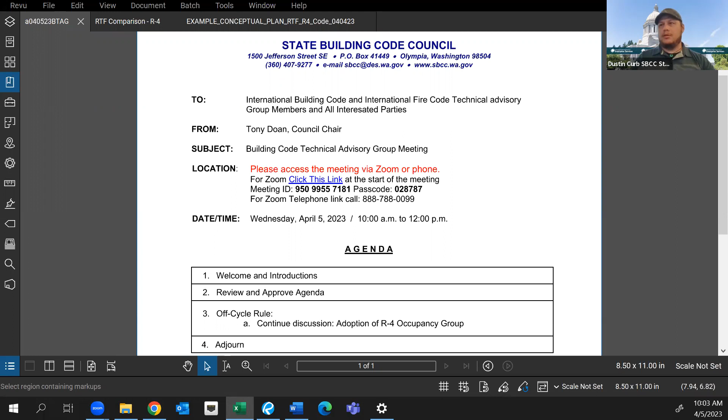Okay, well thank you, Dustin. And then to complete item 1, any other public, any other introductions? Anybody for the public like to be recognized? This is Ron Wright. Thank you, Ron. Thanks.

Okay, with that we'll move into reviewing and approving the agenda. Can I hear a motion to approve, please? This is Al, I'd like to make a motion to approve the agenda as shown on the screen. Thank you, Al. Second. All right, thank you, Michael. Any other discussion? All in favor signify by saying aye. Aye, aye, aye. Any opposed? Nay. Okay, so approved. We'll move to item 3, and I'll hand it over to Dustin or Stoyan, please, to

Remind us where we are. Okay, I will share my screen, and before I do that, just a question for the fire code TAG members. I'm expecting we'll be done with the building code portion today. There are some sections in the fire code, and I was wondering if we need to have specific fire code TAG meetings for the fire code portion. The language is very similar, if not the same. So I don't need the answer right now, but we may need to discuss that a little later.

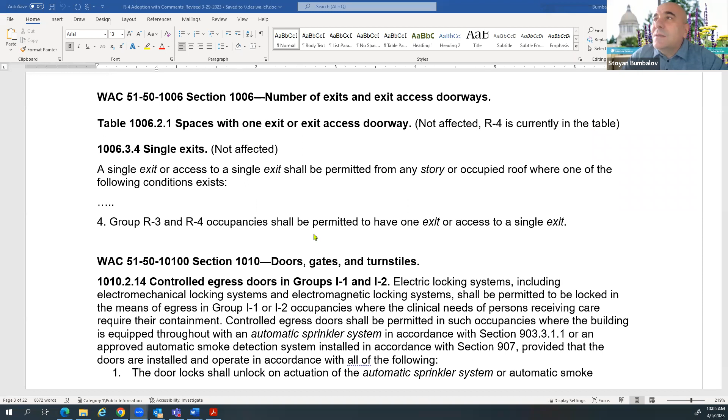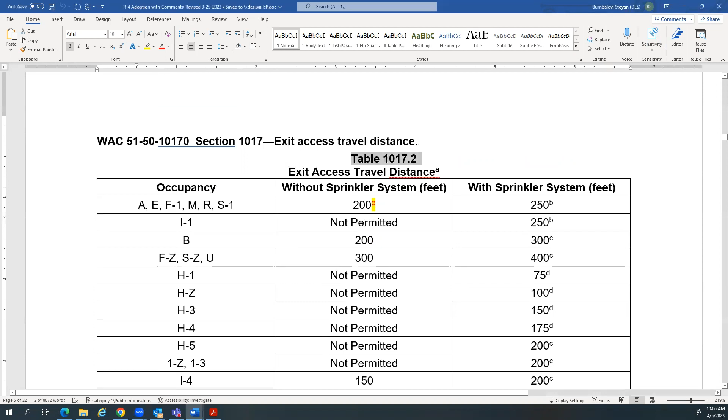And I will share my screen. I think the last meeting we went through section 1010, and I can't recall if we covered this one, 1017.2. I don't believe that we did. I agree. Okay, so but we did cover 1010, right? You agree with me? Yeah, I had agreed that it was no longer part of my proposal, and that I was willing to drop it. We're good then.

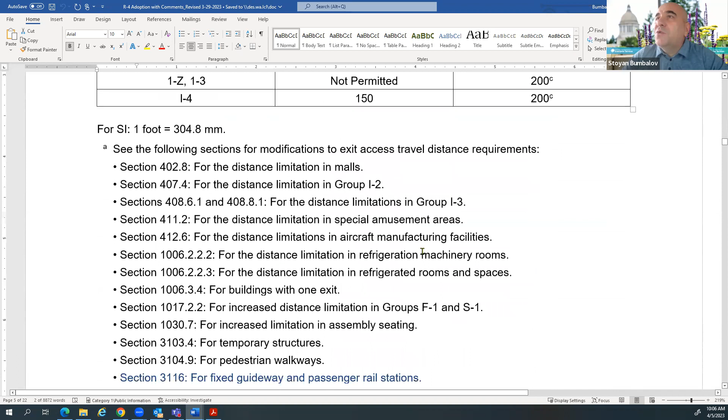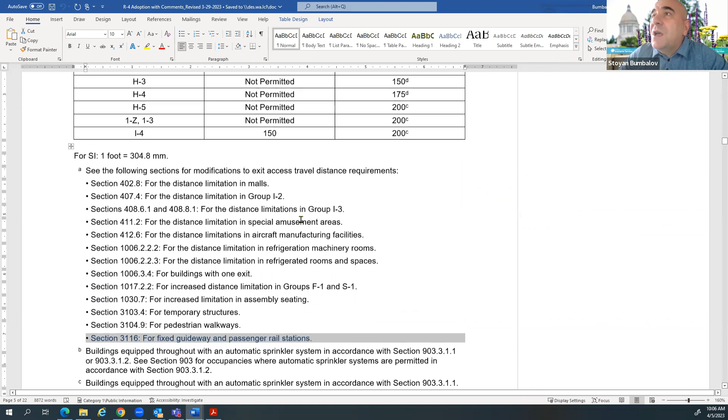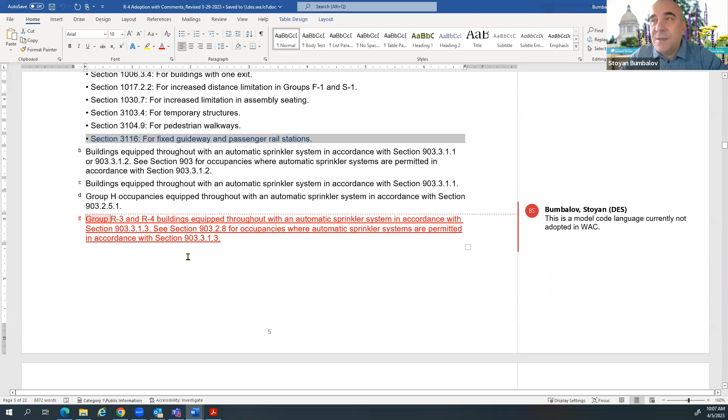The next one, 1017.2, I will make this a little bit bigger. Can you see the comments on the side? Is it big enough? Okay, so we have a model code language that is currently not in WAC, and this section has some existing Washington amendments, which means we need to add it, nothing special here, we're just adding model code language. So if somebody has issues with it, it's the time to discuss it. If not, then I'll go to the next one.

1019.3. So currently we have a state amendment that deletes R4. And if the agreement is that we're moving back R4, then we don't need the state amendment, and in the proposal the staff will show it with strikeout, because again it's no longer needed. So Stoyan, this is Al, can I just ask, you're saying that this state amendment is part of the model code, correct? When you see this R4 facility group, this is part of the model code, and the entire section appears in WAC because of this amendment that you see in blue. If we decide to adopt R4, then we need to add this language back. Well, we need to adopt the model code, which means we have to strike out this section from the WAC.

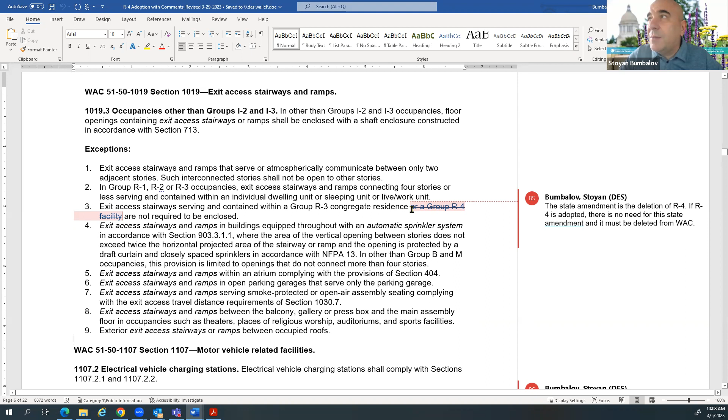Did I make it clear or worse? I thought you would just add back the language that you struck out. No, I'm showing here the existing amendment, how it reads in WAC. I added this here for discussion purposes, just to show you what the existing amendment is.

Well, I'm probably out of turn here. I hope you don't mind, Tony, but I'm advocating for us moving as close to the model code as possible. So I'd like that exception, that language, to come back into Washington State adopted code.

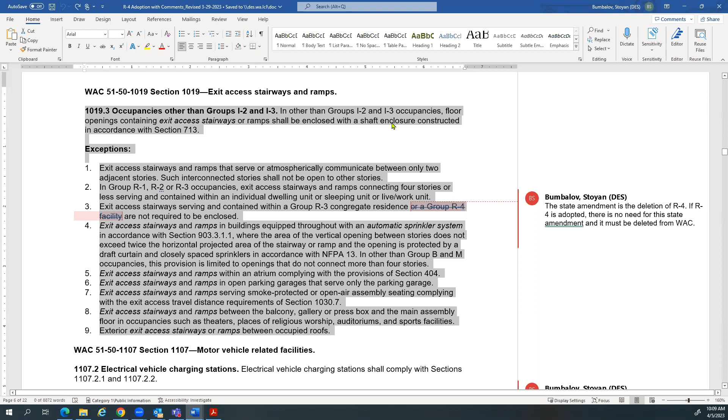My understanding is that's exactly what it does, the way Stoyan's describing it. Yes, it will disappear from the WAC because we will be adopting it in the model code. So would the WAC section 1019 then be reserved at this point after the modification? That's correct, yes, that's the right way of doing it. But again, this is stuff we will do.

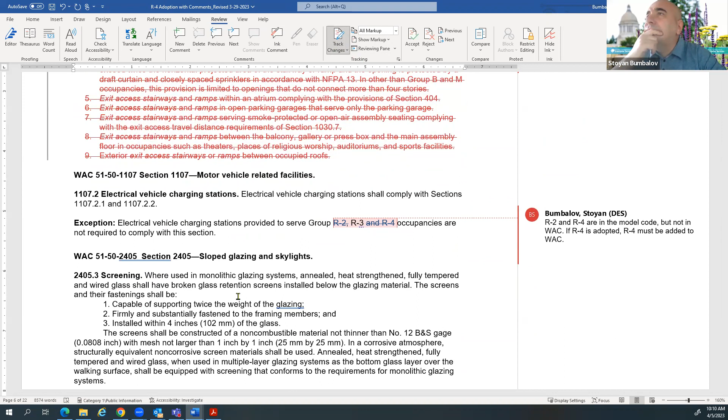11.07. Oh yes, this is related to accessibility. Currently, what you see here is the modification. R2 and R4 are not in WAC, they're in the model code. So the question is, we can't add R2 because it creates conflict with RCW 1927. Do you believe we need to add R4 here?

I checked for conflicts. I didn't see any, but I'd like to hear different viewpoints here.

Stoyan, can you clarify for me what RCW says that would exclude that from R2? The RCW is specific and requires the council to adopt accessibility provisions for R2 occupancies, and the model code excludes R2 occupancies. This is why when we were adopting 2021 IBC, we struck it.

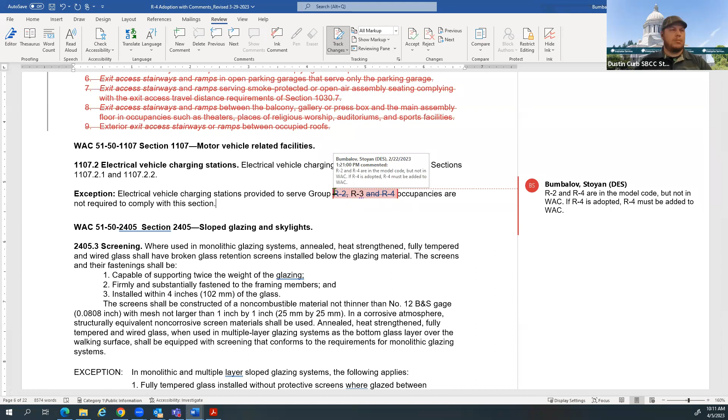So the amendment just needs to say R2 and R3. Or R2 and R4? Yes, that's correct. This is Al, I'd support that. Okay, so we are adding back R4.

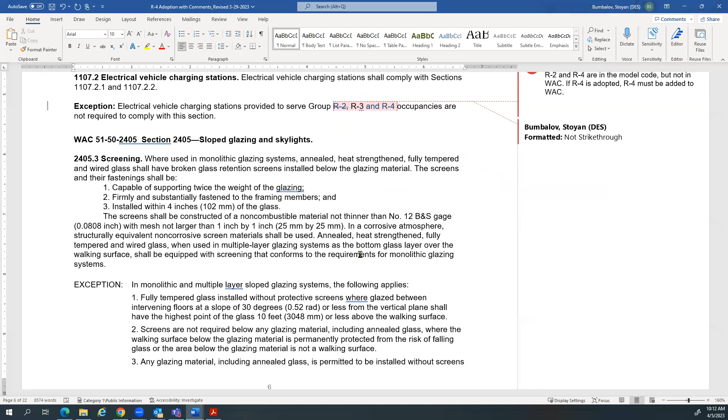Next one is 2405. So let me clarify a little further. This is not part of Ron's proposal, these are just sections that have R4 as part of the language. I'm not clear on that one. I guess electrical vehicle charging stations shall comply with certain sections. You're saying those sections are accessibility.

This is related to accessibility, yes. And if you're in an R3 or R4, we're saying you don't have to adhere to those accessibility provisions. I think the term accessibility wouldn't be the correct term because that equates more to disabilities and accommodations. Exactly, yes, this is the exact case.

No, that's where my confusion was coming from. So that clarifies it for me. This is model code language, and we struck R2 because we adopted provisions for R2 in section 429. Okay, okay.

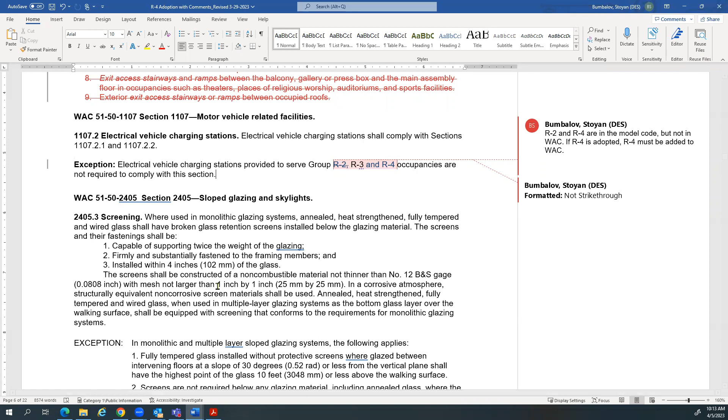2405. So the existing state amendment is the deletion of this text. My understanding is we need to keep it, but I can't consider myself a technical expert on that one. So the section is related to glazing and skylights, and this is the screening.

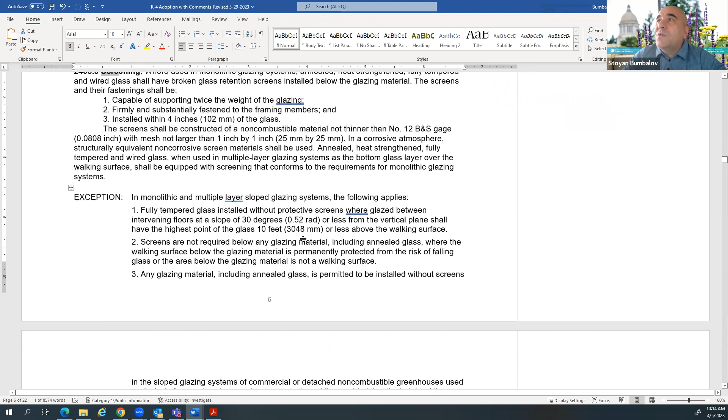And we're talking about an existing amendment in the exceptions. This is Al, I'd support keeping that amendment. I believe this amendment is in there from, I'd call it, an anti-ligature or safety security issue, where if you install a screen, you install a means for someone to secure something to that screen. So the alternate was to include the interlayer that would basically give you the protection against breakage.

So, at least this was a while back, but I do recall this was added because of the need for safety in facilities when you had an issue relating to... at least it came up. It came up more as a safety issue, the screen itself. When I was researching it, I didn't find any rationale for the adoption, but I agree with you, it's been in the code for a long time.

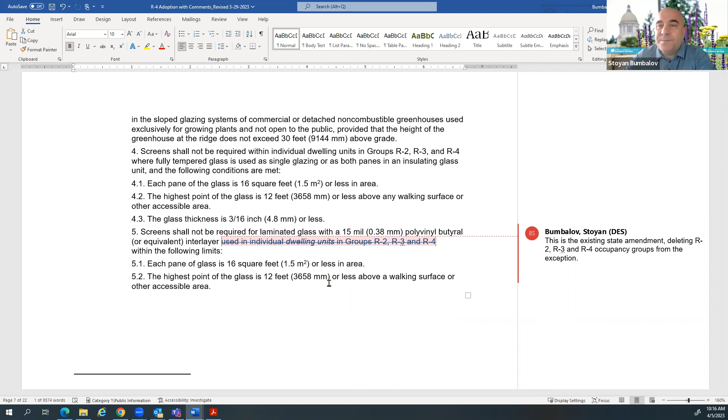Do we have agreement on that? Yeah, I would agree, makes sense. R4 does not change, we need to have what we already have.

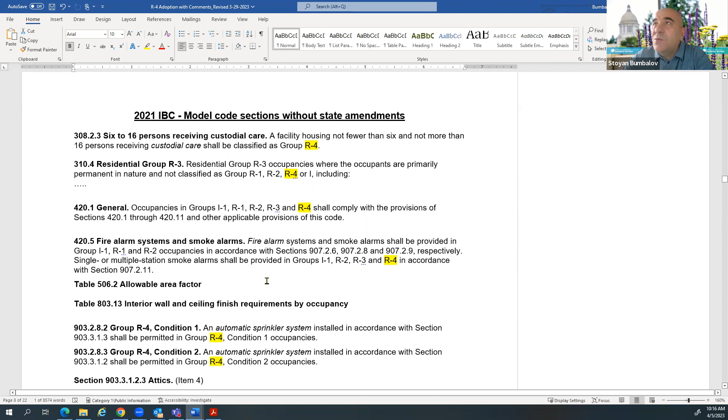Okay, moving forward. So these sections, they are not in the WAC, they are sections in the model code. We have sections here that address R4 somehow. And what the council staff needs to know is do we need to amend any one of these sections?

I don't know, Todd, how do you want me to proceed with that? Should we go section by section, or keep it on the screen, and if the TAC members or members of the public see issues with one of these sections...

Roger, do you want to weigh in? My preference would be to go one by one, because this gets into... well, at least the first one has been discussed a number of times. Is it 16? Is it 15? Is it 18? My personal preference is, if the model code is grouping these R4 as 6, is not fewer than 6, so 5 would be R2 or R3?

R3. 6 would be R4. 16 would be R4. 17 would not be allowed, or would be an I occupancy, I think. Is that right? That's correct.

My preference is rather than saying, in the state of Washington we think we should go up to 18 rather than 16, we follow the model code and put the break at 16 exactly like it is. I completely agree and totally support that, Roger. Same, that's my proposal—this is the model code, we're not changing anything, so we'll keep it.

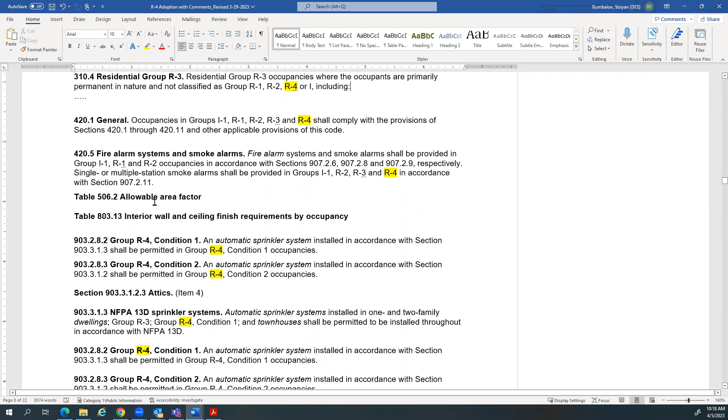420, story—sorry, this is Ken with Seattle. Are you showing the 2018 or 21? This is 2021. So then the 310.5—you already addressed that, right? Yes, we addressed it previously, it was in the WAC. These are only model code sections. Got it, all right, thanks.

420.1, again, it's just adding R4 to R3. Well, we're formally not adding anything—it's in the model code already.

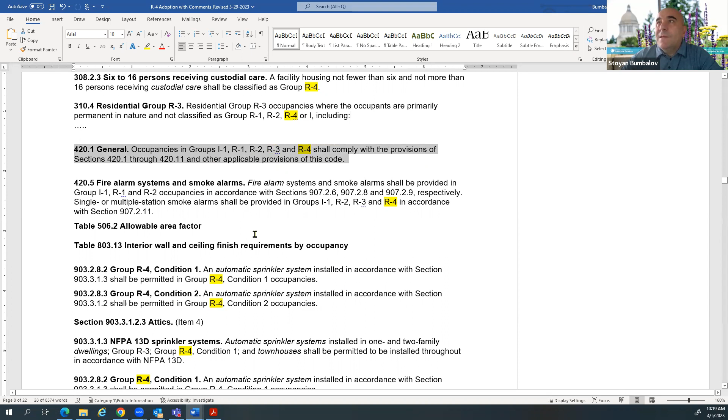420.5, fire alarms and smoke alarms is not my best area of expertise, so I'll wait for the professionals here. I support keeping it. Yeah, all good. I do too.

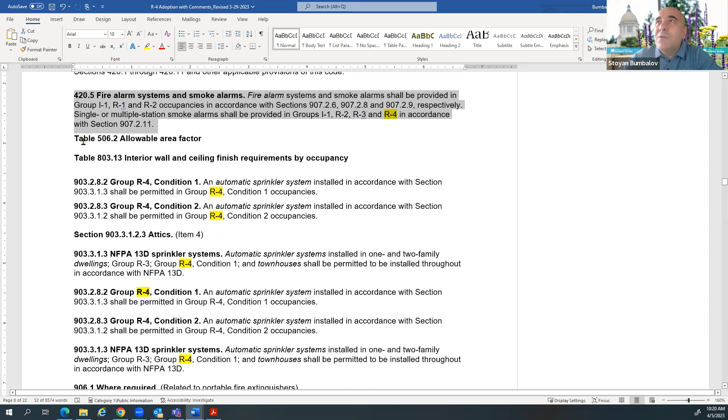Okay, we have allowable area factor and I don't have it here. Do you want me to find it and open the model code? It was a big table, so I didn't show it. No, I don't think so—if the intent is to kind of stick with what the model code has, you wouldn't want to mess with the table. Yeah, I don't think there's any issue with just following the model code. Yeah, I think we're gonna agree, probably, with a lot of these here, unless somebody has a concern.

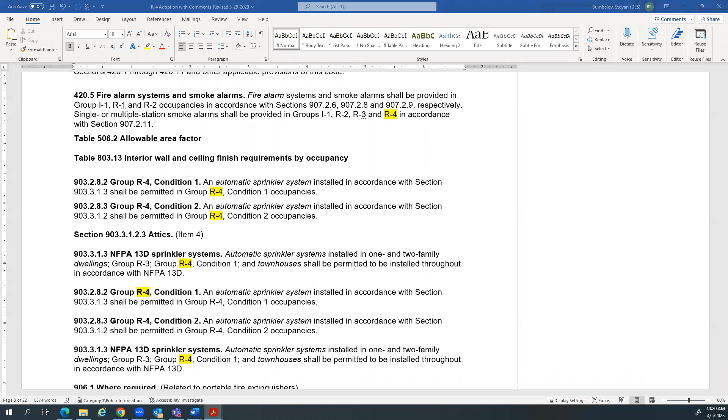But that'd be a new state amendment, so I'm comfortable with just leaving the R4s and all. I agree.

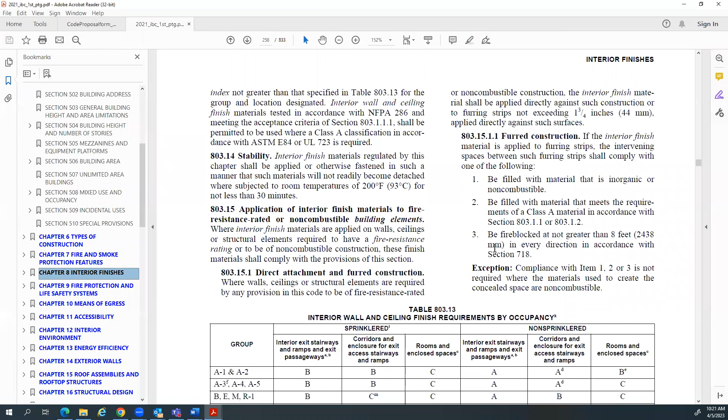I have the code open anyway, so if you need me to show something, I will. So table 803.13, this is the other one I didn't show because it was a big table. I can show it if you want, or if you're familiar with this. Well, I found it anyway. Okay, here it is, I think. It's the same thing—I don't think there'd be any problem with that. No, no reason for us to change it. Yeah, I agree. Okay.

903.282, this is for group R4 condition 1. I guess, again, if we're going with the model code, makes sense to keep it both sections right here. I agree, yeah—this is the NFPA 13D, 13R issue.

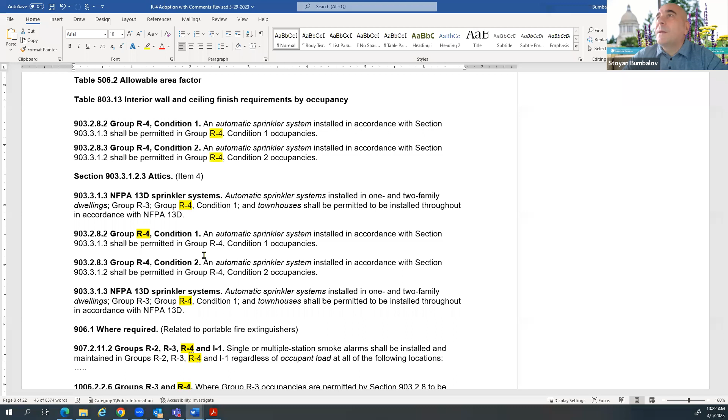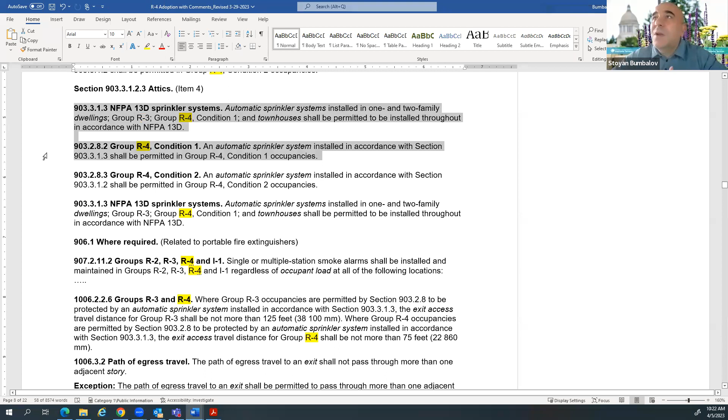903—sorry. 903.3123, do you want me to show it? I don't think we'll need to. Good, okay. 13D sprinkler systems, again group R4, model code. Well, we don't have it in WAC. Following the same logic, I guess you would like it in the code, same with the next one, group R4 condition 1 in 903.282.

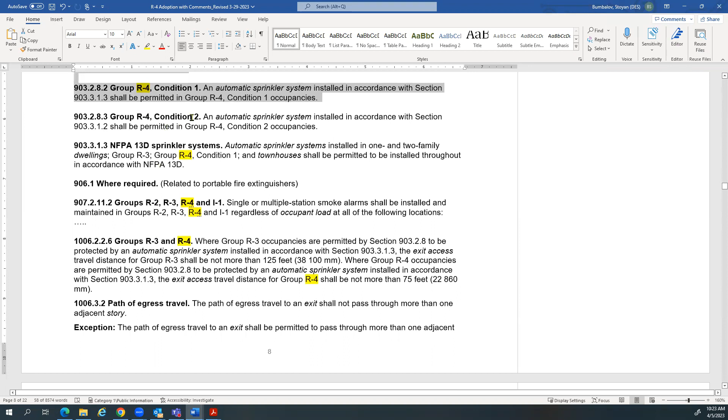Agree, yep, same with 313. Same with condition 2, I assume? Yep, yes. NFPA 13D, yep.

906.1, this is related to portable fire extinguishers. I don't have the text because it's a long section—if you want me, I can show it, if you don't we can go. Let's go with the model code. Let's go code, yep, yeah. Okay.

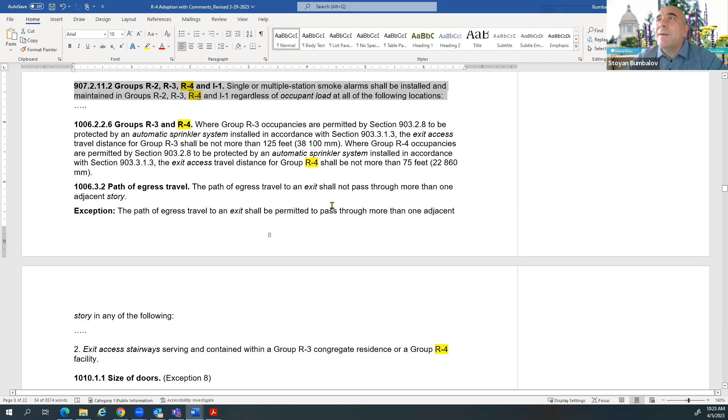907.2.11.2. I'm good. Okay, let's keep it.

Chapter 10 is always interesting. So, 1006.2.2.6. This is in the model code. Again, it groups R3 and R4.

There's no sense changing it. I agree. Yeah, good. Okay.

Path of egress travel, we have R4 in exception 2. Again, it's grouped with R3.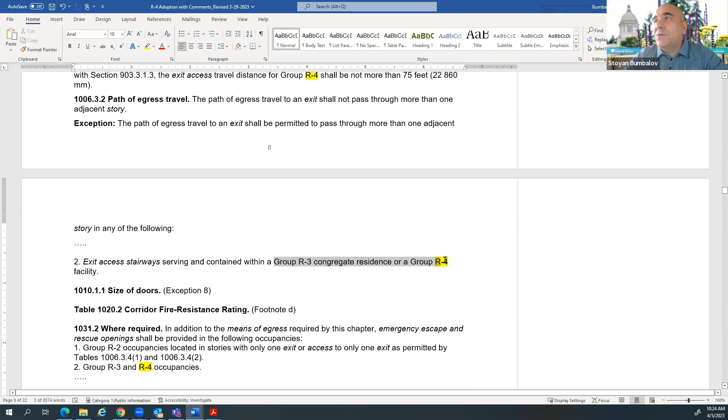Thumbs up. Anybody with thumbs down? No? Hey, that's easy. I'm not used to it.

1010.1.1, size of doors. We have R4 in exception 8. I don't have it here because it was too big of a section. If you want me, I can show it. If you don't, I can go.

Model code for me. Yeah. Model code. All good. Okay.

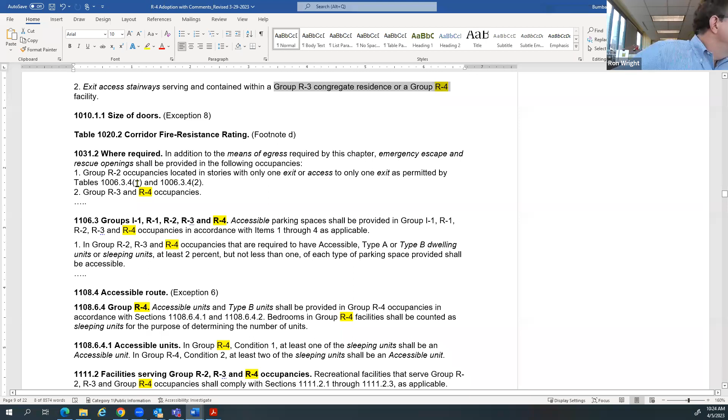The same with the table. There is R4 addressed in footnote D. It's kind of a big table, so I don't have it. The same, model code.

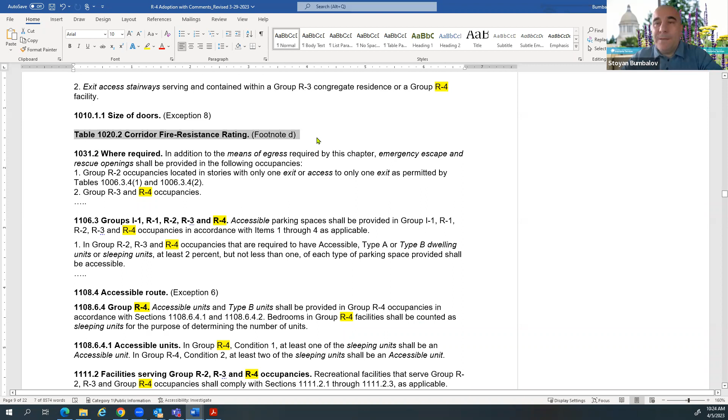1031. This is for the emergency escape and rescue openings. Again, group R3 and R4 are in the same.

Yep, looks good. Let's keep it.

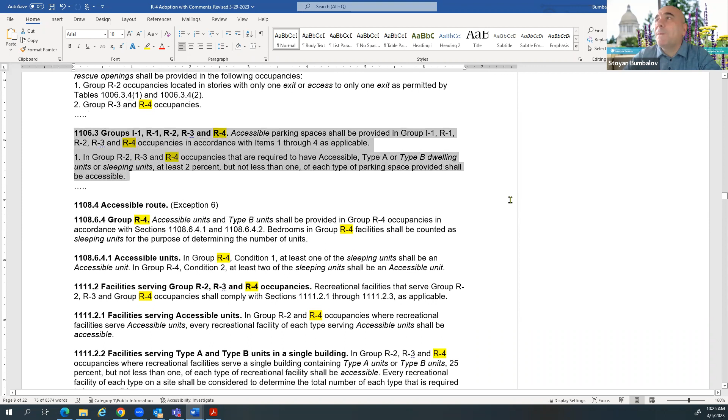This is accessibility. Okay. R4 is again with R3. Keep it. Yep, good.

There is a specific section for group R4, for let's see. Okay, so this is the scoping for R4. We need that.

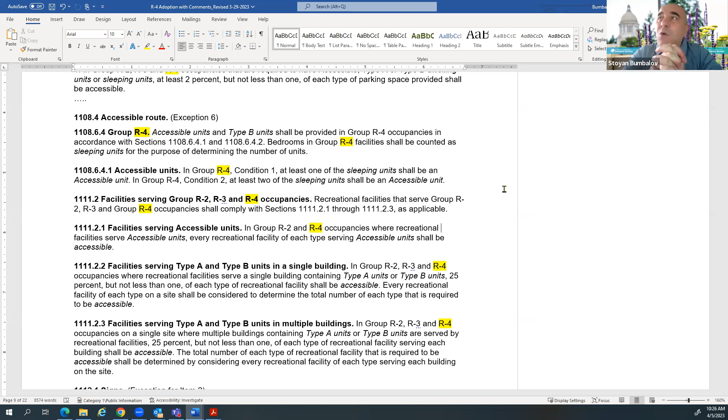Yes, fine. We had a follow-up, maybe an unfinished sentence from our previous session, but yeah, this is all fine.

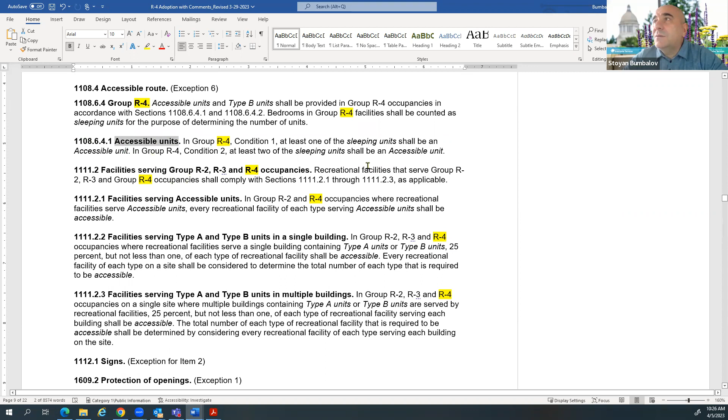Okay, so this is specific to the accessible units in R4. Good there. Yeah, keep it. Okay.

1111.2. So I don't know, is this one really challenging. Yeah, that looks good. Don't stress me, keep it out.

But once you mention recreational facilities, you never know what's gonna happen. Oh wow. Yeah.

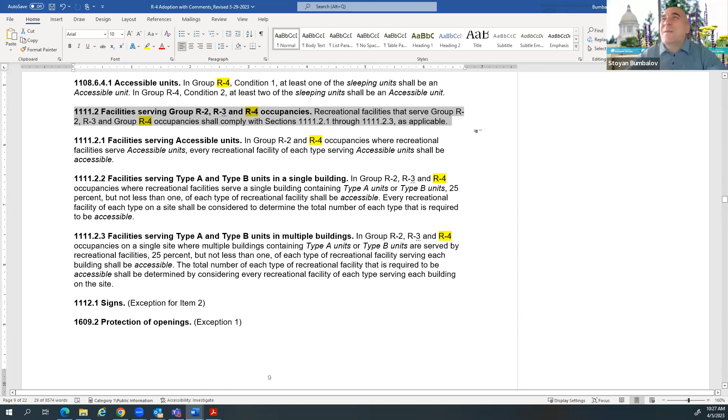This again, recreational facilities serving R2 and R4. Keep it. Yep.

This is still recreational facilities serving type A and type B units. So again, R3 and R4, following the intent. I'd keep it.

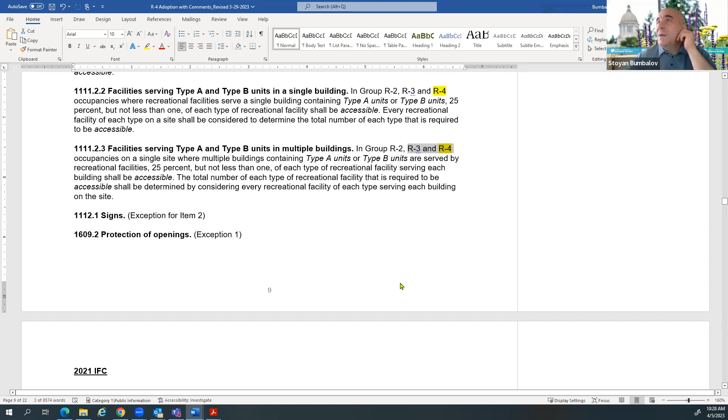This is for multiple buildings, the same thing, recreational facilities serving type A and type B units in multiple buildings, again R3 and R4. I'd support keeping it.

1112.1 is related to signs. R4 is mentioned in exception 2. Again, I don't have it because it was a big, long section. If you want me, I can show it.

I think we're good. Okay. Protection of openings, the same thing. I might like to see that exception.

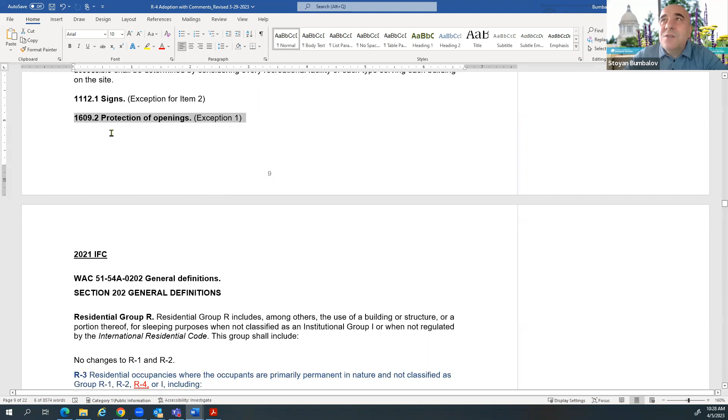Which one? 1609? Yes, okay. Well, you know what? Yeah, let's just take a peek.

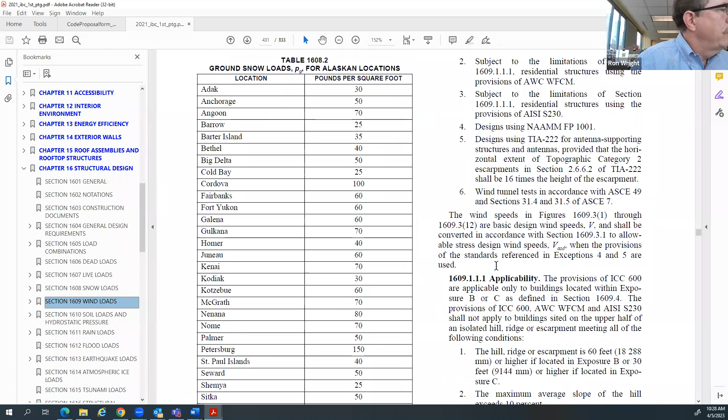1609. Oh, wind loads? Yes. Yeah, that's not an issue. No, I'd keep it. Okay. Yep. Yeah, okay.

I was thinking about opening protectives. Sorry about that.

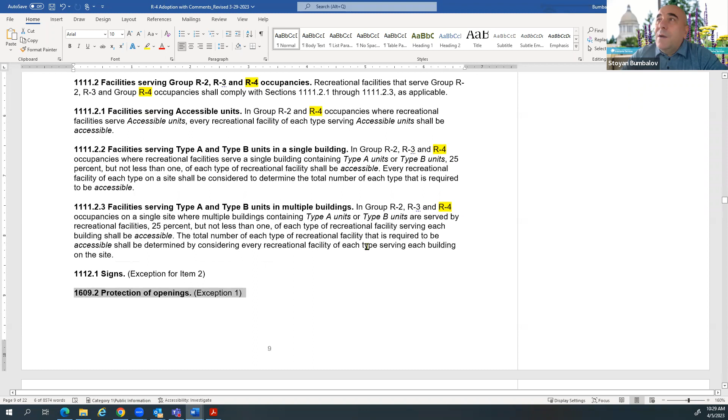Hmm, okay, so this is all in the building code. I think if the technical advisory group is in agreement, we can prepare the draft for the CR 102 and have it for the next BFP meeting next week and for the council meeting.

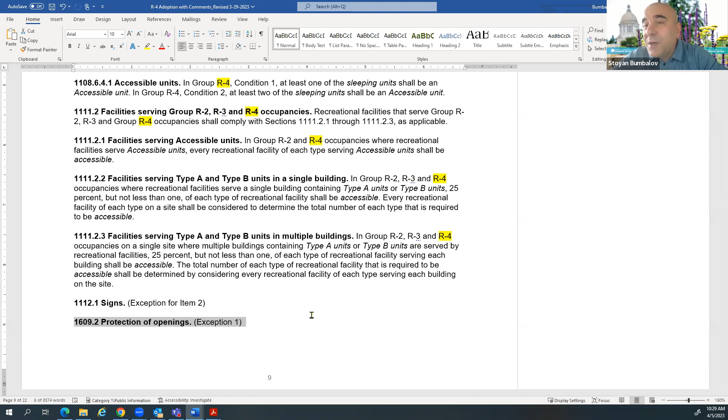And these sections here in the fire code, they were part of Ron's proposal. And I also have the sections in the model code that have R4 in the text.

May I ask Ardell and then Roger. Thank you, my name's Ardell Jalla, building official for SDCI. I'm sorry, I don't know the rules of the tag and engagement, so thank you for acknowledging, letting me ask a question.

One of the differences between I1, C2, and R4 is separation to rated corridors. I wanted to know if, I'm sorry I'm trying to track here, I'm not really seeing the discussion around differences between I1, C2 and R4. Is that going to be discussed?

This goes, this is Ron Wright. When I mentioned one sentence, it goes back to, and Ardell, I think we had this same conversation regarding dwelling units versus sleeping units, which is what really, there's a statement, there's an amendment which we talked about, but I don't know if we had resolution to, which requires units to be, I'm paraphrasing, but requires everything to be designated as sleeping units.

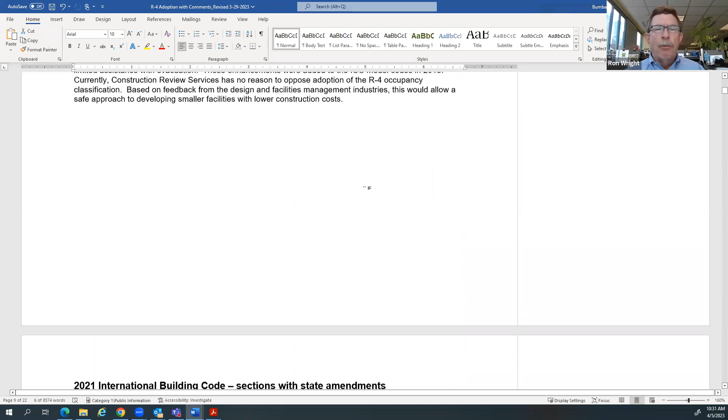But then that creates all of the fire partition and corridor separation, and in fact creates a situation where all the sleeping units can't be open to an open common room. It becomes an intervening room like a corridor.

There's a lot of issues related to that, but there was one sentence that Stoyan brought up in 420.2. We talked about the fact that if we're going to have a sentence like this, it needs to be back in the definition of a dwelling unit and a sleeping unit. There's a huge difference over whether you classify an 8, 10, or 16 bedroom residential treatment unit as a combined dwelling unit, or whether you individually classify each bedroom as a sleeping unit. If you do it as a sleeping unit, you've pretty well switched over to all the code provisions you'd have with an I1 condition. That one sentence negates the R4 essentially, is the point we were making.

I'm not sure we got a resolution last week on this one sentence. I want to let the tag know that SDCI's stance, the Seattle Department of Construction and Inspections, is that these are sleeping units and that RTF is not a dwelling unit. I don't know if Ken Roulette feels the same way, but we see those other R4s listed there as sleeping units that require separation, and they would have a rated corridor as an R occupancy. It's a disagreement with Ron and I on how we are interpreting the code.

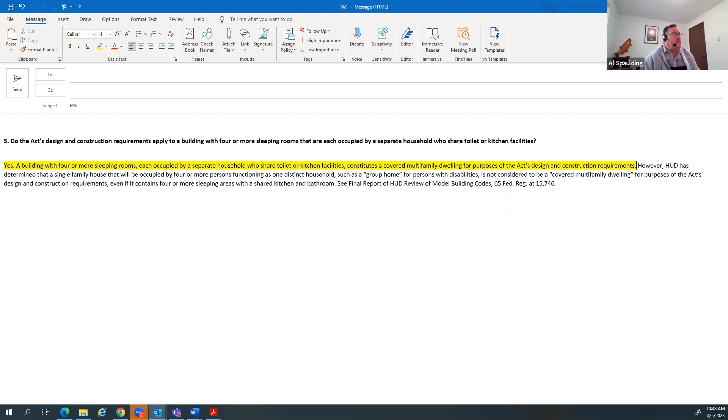If you're in a condition 2 and you have a 13R, you are going to have some monitoring of the water flow switch, but that's not what we would even know as a traditional fire alarm system. So yeah, there's some gives and takes here, Ron. I agree, but they're taking this approach. If we look at all the mitigations that would be changed going to the R4...

I'm saying that we're likely saving you over 30% just to go to this R. And I don't design these like you do, and I don't understand the costs, but as you do, so I'll defer to you in that regard, Ron. But I think this is a reasonable position for us to be in. We can always try this out in the state the way that we have it, and if we have a good fire history, maybe this would be a good opportunity, something great for looking at the next cycle.

Thank you, Al. Go ahead, Stoyan.

I found the HUD and DOJ interpretation. It's question 5, this is how it reads. This is related to Ron's question about the Fair Housing Act. It says it applies, that was my point. That the act applies so that designating the bedrooms as sleeping units, in my interpretation of this, if you have up to 16 and a family can be in 16, you can't turn around and under the Fair Housing Act designate them as sleeping units for non-related individuals.

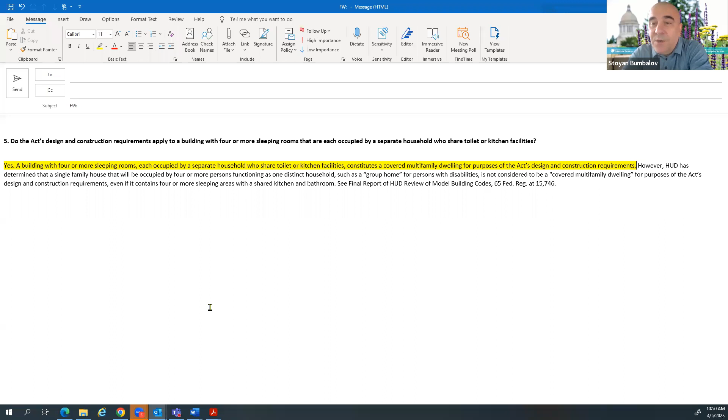I don't, Ron, with all my respect, I don't believe these are related. I mean, okay, we can continue the conversation. I'm okay with it. I'm just sharing an opinion here. Yes, no, I got, thank you very much.

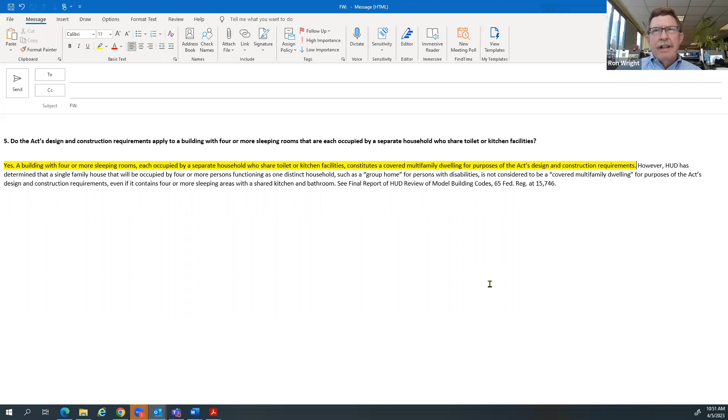I'm willing to take a look at it further myself, because it is, as I've noted, a major cost implication, and we've run into a lot of difficulty with building officials having to explain an intervening room that has couches and people sitting in it, and it's not a corridor because it's a common area. So we've had a lot of education in a lot of jurisdictions over how we deal with an intervening room off of sleeping units designed for the treatment of individuals. So it's come up, it's a big issue.

Okay, thank you, Chris. Let's give you a chance here. Well, hopefully my mic's a little closer to my face now. I'm definitely from the perspective of...

Interpretation in the same vein as Ardell and Al. They are sleeping rooms, they're sleeping units. They are individuals that are transient in nature, right? It's different than other group home situations where people are living there forever. I think of a convent, right? You are operating as a family when you are a member of a convent. And so the risk goes down because you are familiar with the space, the people around you, you know them, you live with them for a long time.

It's similar to having roommates in college, right? You are operating as a family unit. When you have a treatment facility, you may move in, you may move out. You are not operating as a family unit, so there is risk. That's why the code requires that 1 hour separation for those sleeping units.

I hear what you're saying, Ron, about that intervening space and understand why it's needed. And I totally would approve something like that in Tacoma, right? So I think instead of solving the problem with this amendment to not require the rating between the rooms, we could solve it through either interpretation or amendments elsewhere that clarify that intervening space that is kind of a corridor with some furniture is acceptable. I think that's the way to solve the issue, is address what we would like to see built while maintaining that fire safety.

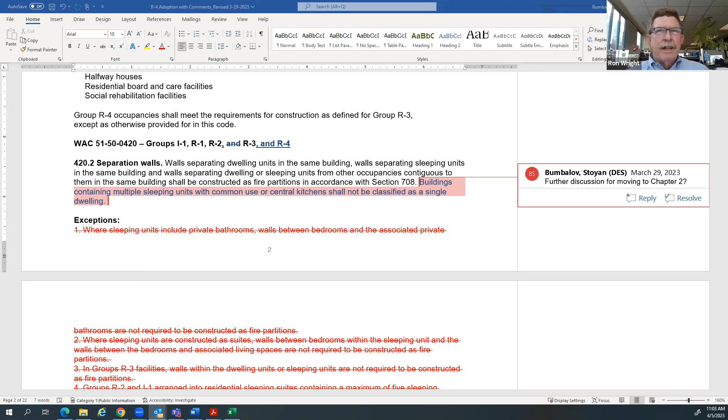Yeah, my suggestion is if you're looking at using base code, model code language, and putting group R4 back into that section, you better have an exception that can be used uniformly across the state, not just have to do it jurisdiction by jurisdiction if you're not going to provide it. I agree, that's an operational issue related to these facilities' security that would be important to include. And that's the way we built them. You can't have operable windows because of the contraband problem.

Sounds more like an I than an R to me. Yeah, and it happens, believe it or not. Even with a condition R4 condition 1, it's detrimental if a husband comes by and delivers food to a weight loss clinic through a window. I'm not kidding. Even with some of the lower order behavioral health, they have people throwing drugs over the fence. So it's an issue where they need to have control over access to the windows. And if it's a permanent screen, that can possibly be fine, but in general it's typically better to have the window fixed. And if there needs to be something in that openings section, then that probably should be looked at, because it's how we do it, at least how we've done it in the facilities we've been building.

Hey Al, and then I want to take a pulse on how we're doing here. I would just say, we license all the RTFs in the state of Washington at the Department of Health, and we've worked with our providers very successfully. I would be opposed to an exception to the model code that requires escape and rescue openings when applicable, because the providers regularly alarm the windows. There's lots of operational ways that they can control elopement, the passing of contraband, and things of that nature without having to eliminate the escape and rescue openings.

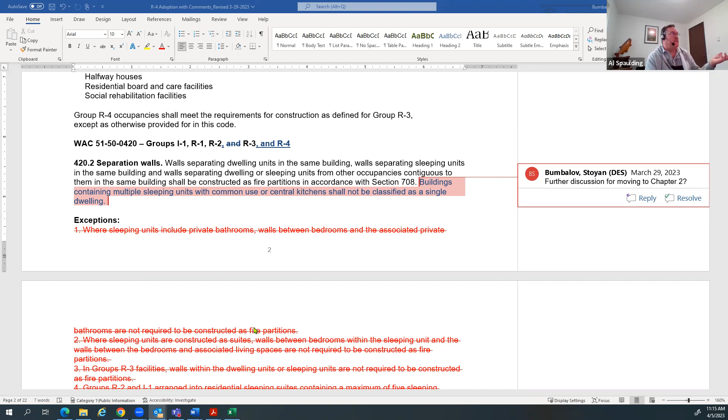Okay, well, I could make a motion to keep the sentence in 420.2. We already previously agreed to that at the last meeting. But I will make a motion to retain the last sentence of 420.2 as shown on the screen. Okay, Michael, that's how you understood it? Correct. Second? That's what I seconded, yes.

Likewise, I thought we were trying to formalize a vote to move past this section, whereas we had consensus on the other one, so we were going to do an official vote here. Anyone else? Does everyone else understand it that way, or have anything else to comment on?

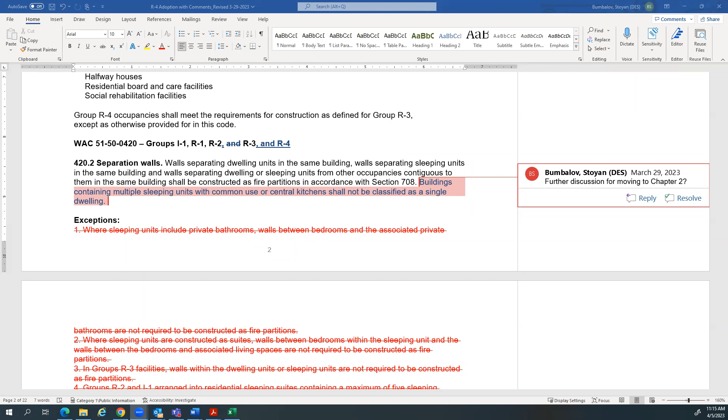Ken, please. I have a quick question. Are the exceptions still proposed to be deleted? Yes, so exceptions 1, 2 and 3, they're no longer in the model code. They were in the 2018 first printing, but ICC removed them because they were included by mistake, and the SBCC didn't catch that. So exceptions 1, 2, and 3 are no longer in the model code, and we'll remove them. The agreement was for exceptions 4 and 5 to be removed as well.

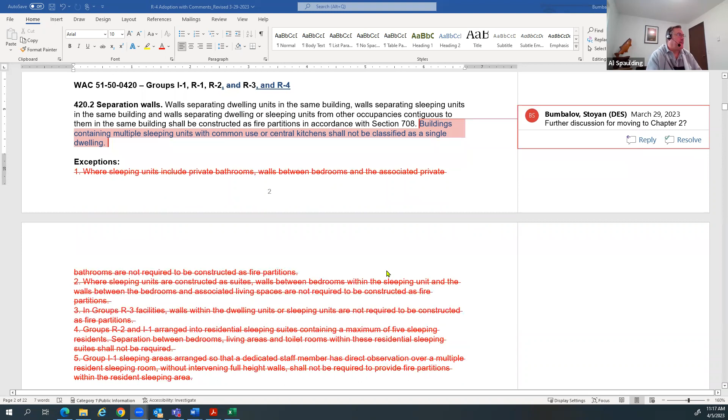I would really like to see a clean copy of what I'm voting on, and not just what's on the screen. It would be nice if we just had one clean copy of the document.

You can't have a cleaner copy than what you have, because these sections, these exceptions, will be shown with a strikeout as part of this proposal, since there was a discussion last Wednesday. Again, exceptions 1, 2, and 3 shouldn't be there—they should be removed, it's an editorial correction because they're not part of the model code anymore; they're here by mistake. The agreement was that exceptions 4 and 5 should be proposed for deletion, and that was voted on last week to get rid of 4 and 5. So even if I sent you a cleaner document, these exceptions would still be shown with strikeout. I just want to make sure—it was voted on by the TAG to remove it.

So if I can jump in again, we haven't voted on the whole package, right? We're simply trying to move forward on this section and then fold it into the main package for a recommendation.

Todd, if I can, I took over for you running the meeting last week, and there was a lot of discussion last week about all of these items. It was agreed, as Stoyan explained, that items 1, 2, and 3 need to be struck out anyway because they are not in the model code anymore. There was discussion on 4 or 5, and there was general agreement to strike those, and we moved on. At last week's meeting, there were no formal proposals or acceptance of anything. So the current motion on the table, which does not address the exceptions, I believe it only addresses retaining the one sentence up above, is the only motion we've had officially as a tag.

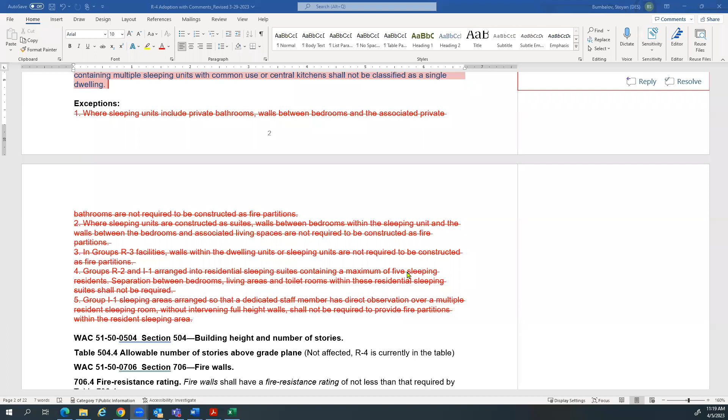Go ahead, Dave. This is a clarification because it's been a little bit confusing. Is this only the building tag members who can vote, or can both building tag and fire tag, who are represented here, vote?

This is for the building code tag, and I started with this question for the fire code tag members. When we get to the fire code sections, if you want to vote for these specific sections, because most of these sections are the same, we can get to those a little bit later. You folks provided your comments, and to the best of my understanding you agreed with the proposal so far, but I will leave it up to you if you want to vote on these specific sections. I'm not sure how you want to do it. But for this vote, this is the building code tag, this is part of the building code. If the agreement is that the tag members want to wait until the sections in the fire code are discussed, it's up to you how you want to do it.

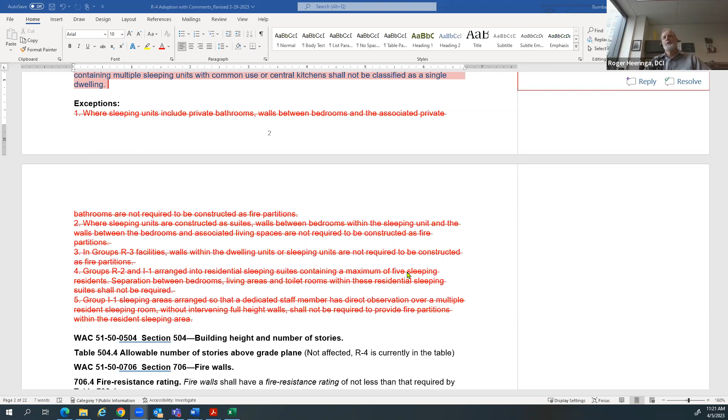Okay, I think we have a current motion on the table, so you're withdrawing that other motion. Is that the point of order I was going to hear? That's the point of order. I believe there's a motion on the table, and it's been seconded, so we need to vote on that. Then there can be another motion.

Thank you, Roger. And does everyone understand it? As Roger explained, we're simply trying to move past this one section where we've had a lot of discussion, to then move on towards a whole package, or a decision to let the fire code review it also. Does everyone understand that? Can we take a simple vote on 420.2?

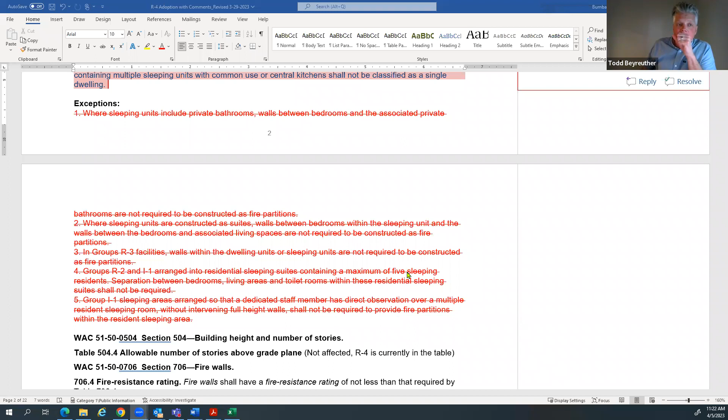Can you scroll up just a little bit, please? Okay, so the motion on the table right now is to vote for inclusion of this sentence, so we can roll this into the package and move past this discussion.

Let's try a simple voice vote of the IBC tag members. All those in favor signify by saying aye. Aye, aye, aye. Any opposed, nay? I'll repeat, any opposed, nay? Okay, so the ayes have it.

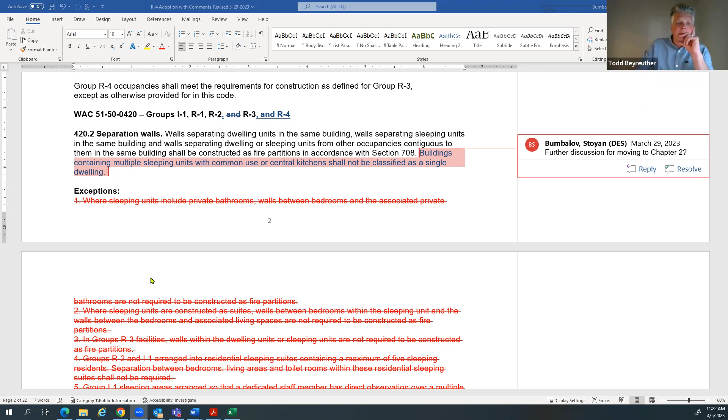Now let's finish off discussion. Is everyone comfortable with the exceptions? Was there some concern about the strikeouts of the model code and then the two amendments? Okay, all right, Adele, I'm sorry.

So I just want to be clear, starting on the history. Exceptions 1, 2, and 3 are in the model code in 2018. They are stricken from the 21. I don't have any issues with that.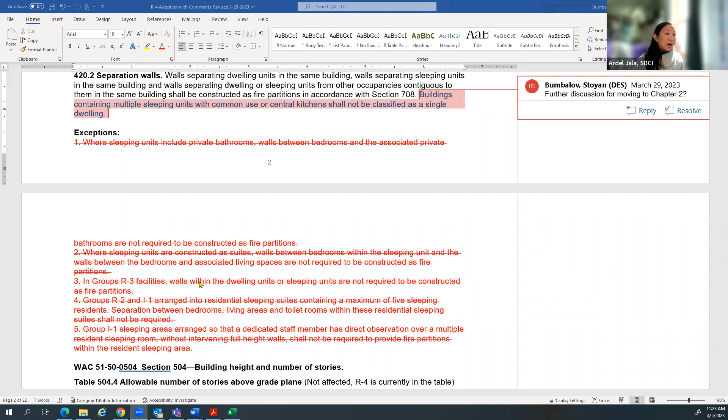Exceptions 4 and 5 are existing Washington amendments that the state tag did not, I don't know, I'm going to need to go back and look at the CR 102 and 103, not just what's posted on the WAC. Are you able to verify that the state did not continue the existing Washington amendments of item 4 and 5 in the 21 code adoption? Not just what's in the WAC, but what's in the CR. In the CR 103, you will see this.

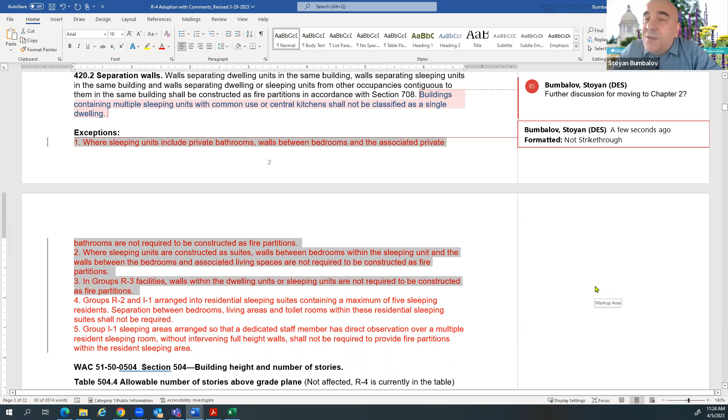4 and 5 is stricken out? 1, 2, 3, 4, 5, nothing is stricken out. Okay. So at the state process, the 21 code adoption, the state did adopt exceptions 4 and 5. Is that correct? The state did adopt the model code, and by mistake we included exceptions 1, 2, and 3, and they're not in the model code. So I'm fine with the tag here addressing what looks to be an error at the state tag process in terms of 21 code adoption.

So I just want to caution that may be a little bit outside of the scope of this work group. We're addressing 4 and 5. So I just want to question whether the intent from the state tag process, the 21 code adoption process, was to keep Washington amendment of exceptions 4 and 5.

No. And then, is that really within the scope here to address other provisions outside of R4? The agreement last time, and I'll provide more details on that, but the agreement during the last meeting was to strike exceptions 4 and 5.

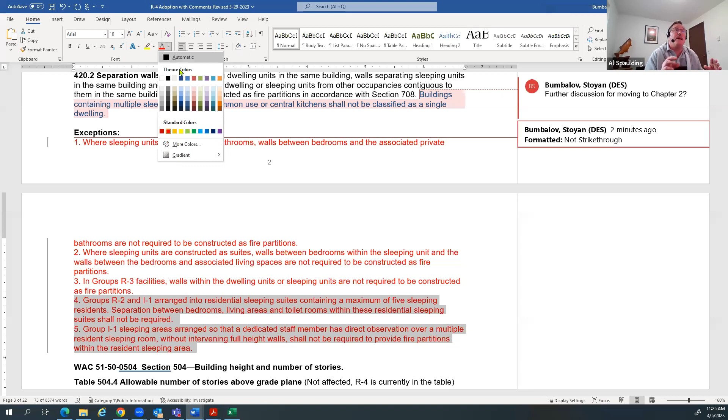Go ahead, Al. Okay, so Ardel, these are the Department of Health's, we submitted these state amendments for the 2018 cycle. So these were supported by the tag and we got them into rule. This was 4 and 5, sort of a Band-Aid approach to some of the concerns that Mr. Wright had previously brought up. So we were trying to provide some relief with 4 and 5, but we all agreed at the last meeting that with the relief provided with the adoption of the R4, exceptions 4 and 5 are no longer required.

Okay, and I apologize to the tag for taking up time that has already been dealt with. No, and exception 5 in particular was related specifically, if I recall, to the unit that's in Seattle that in fact is designed like this.

And it basically, as Al just said, 4 or 5 years ago, we had to come forth and create a solution that responded to the operational methodology of the behavioral health units. And so that's how number 5 even showed up. I realize this is the process of the tag, so I apologize for repeating it. I do still stand that this is outside of the scope of this particular work group and the R4 off-cycle rule.

So Ardel, it's completely appropriate to bring it up, and I'll just give one last chance for everyone before we would roll it into the package of challenging that.

I guess the only thing I would point out is that the reason these items are here is because we didn't have an R4. And so that's the relevance, is that now that we're coming back with the R4, the methodology is to go back and look at the things that were added to the code to respond to the fact that there wasn't an R4. That's why these 2 items have come forth as topics, because they related to the R4 question a few years ago.

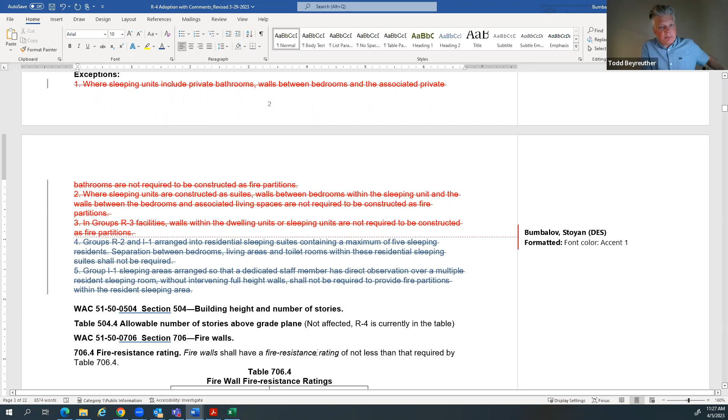Okay, thank you for that. We'll make sure that if that question is raised in the BFP, then we can address it.

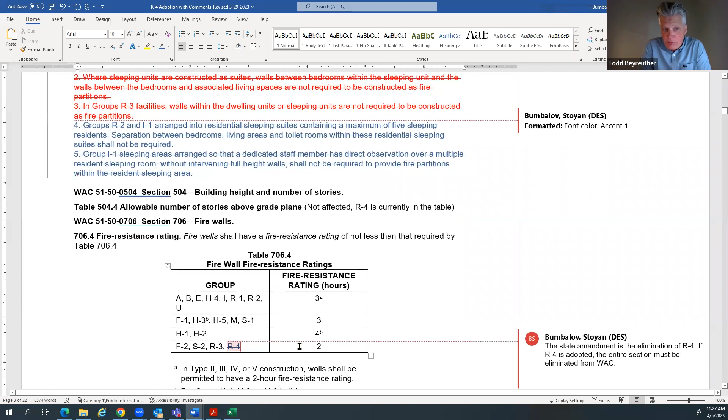Okay, so with that, are we through all sections that need to be considered? There was a comment the last time. My proposal was to eliminate this table, and somebody made a comment that it better stay for now, because I think Micah wanted to discuss it, if I remember correctly, but I never understood why. So I want to point that out. Okay, we don't have Micah today, I don't think, right? I don't see him.

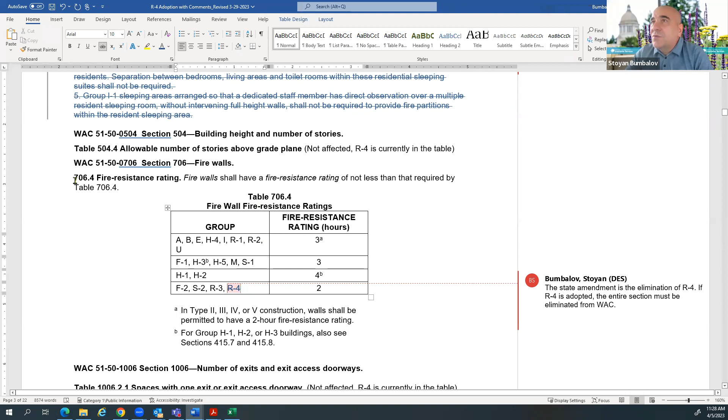Anything else you'd like to note on this, Stoyan, or feedback? Well, again, this is the state amendment, the removing of R4. If we are adopting the model code, then we need to strike the entire section from the WAC. And I showed it stricken last time, but Micah said he wanted to discuss that, and I wasn't sure why. I don't have my notes here, and we don't have the minutes ready yet, but my understanding was that he wanted to discuss that.

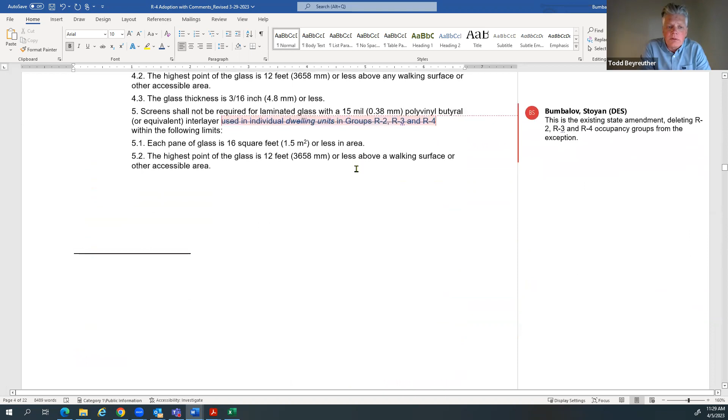Okay. So let's park that and have a discussion here about whether or not the IBC tag is ready to make a recommendation, or whether we should wait for the IFC tag if the tag wants to meet. So maybe I'll open it up to IFC tag members, per Stoyan's question, of what your desire is.

I heard some concern earlier about whether the IBC tag should make a recommendation until the IFC tag can do a review and have an IFC tag meeting. Is that true? This is why we invited the IBC and the IFC, because most of these sections are with the same or similar language.

So what I did with the IFC, I made the same edits as the building code. So the sections you see highlighted here were already discussed at the IBC technical advisory groups, and IFC TAC members provided comments.

So can someone advise us on process, or can IFC tag members advise us on desire to have a meeting and take a vote? I would like to point out we don't have an IFC tag quorum. Right, and that's why I just was asking for opinions from IFC tag members here, whether there's a desire to have a separate meeting.

Okay, I'm not hearing an opinion. Stoyan, Dustin, what's your recommendation? As somebody who's on both tags, I'm not exactly excited to have another meeting. Understood. I think you have perspectives from some of the more vocal members of that tag, even though we don't have a quorum. I agree, Chris. I think we can conclude our business and if so desired, make a recommendation and a motion for a recommendation.

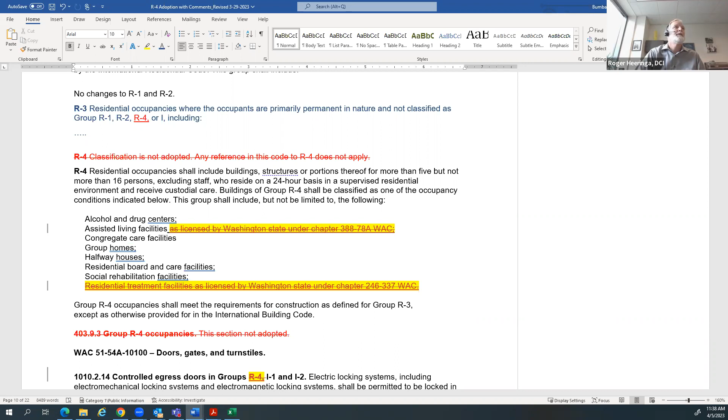Adam Phillips. Alan Spalding. Aye. My thing messed up, hold on. Andrea Smith. Bill Bush. Aye. Let's see, Charles Cavano. Chris Seaman. Was present earlier, not present now. I'll come back to Chris. Sorry, I can't find the mute button. Aye. Oh, all righty. Corey Thomas. That's a no. Aye. Dave Germer. Michael Barth. Aye. Susan Kaufman. Aye. Roger Heeringa. Aye. Sean Karlstrom. Will Rodriguez.

And the ayes have it. Thank you for that. Okay, with that, is there anything else, Stoyan or Dustin, we want to say about this agenda item?

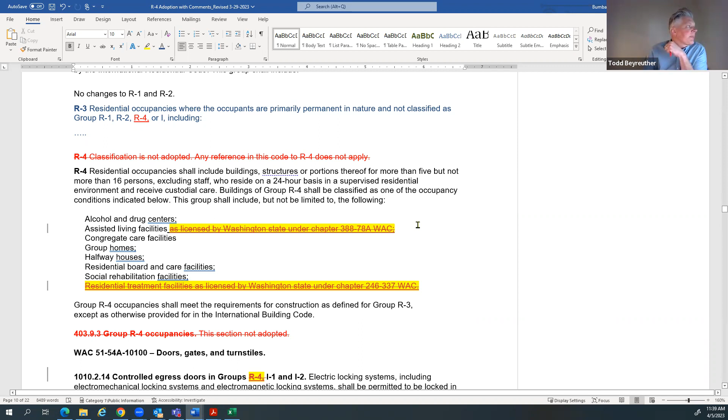If there are still technical advisory group members, the IFC technical advisory group members, are you okay for meeting next week at the same time to go over the fire code sections? Well, we'll send an invite and we'll see if we can complete it. If we can't, then we'll figure out something else.

A point of clarification, Stoyan, the proposal I submitted with the fire code, we've discussed modifications to my proposal and have been accepted. And those would carry over to the applicable sections that are identified in the fire code.

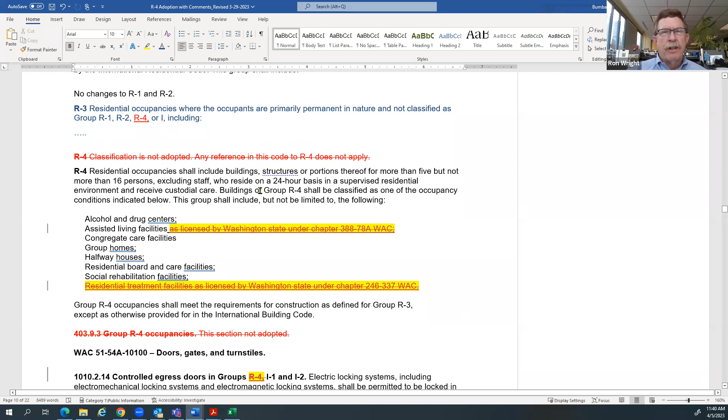Yes, but because I think I heard fire code TAC members wanted to have a discussion on this, this is why we'll have the fire code TAC discuss and approve. But they would obviously have our comments with them, so they'd know what we discussed already, as far as, for instance, these first sentences that are highlighted, and we had a long discussion about these last week. We had members of the fire code TAC attending the meetings.

Yeah, okay, and I can't predict if they would like to discuss these sections again, and this is why I highlighted them and kept the initial language just to show what was the decision related to the building code. Because the same provision regarding 1010.2.14 would be applicable, but I acknowledge it wasn't necessary to include in the building code, and so we pulled it out of the proposal. Okay, well, this is why I have it highlighted, and I was planning to say this was kind of withdrawn.

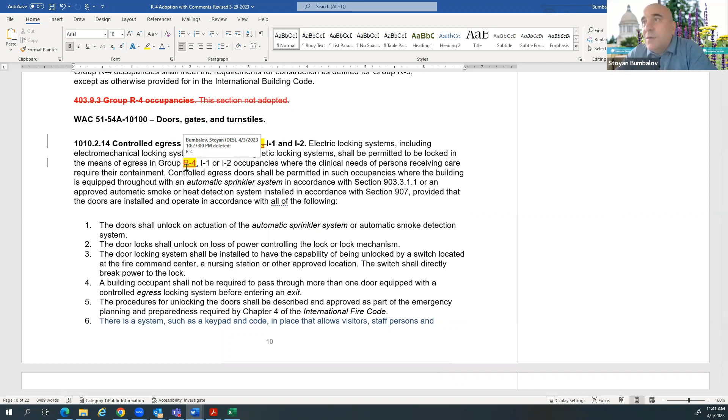Great, I think we have a common understanding on that. I just wanted to keep it in the same format as it was for the building code. Didn't want to make a difference, but I will clean up the document, so the fire code TAC will have the language that the building code TAC agreed on, so they can compare, and if they want, they can discuss it.